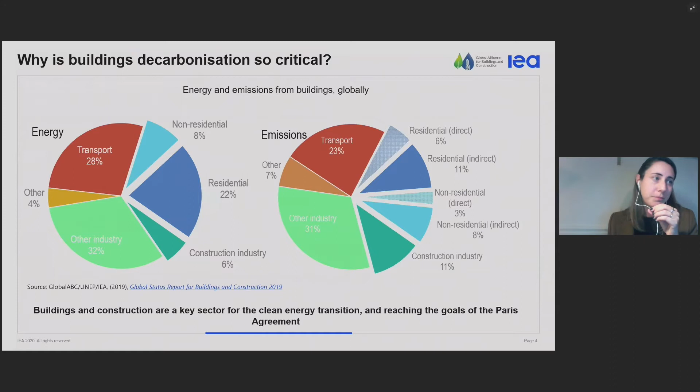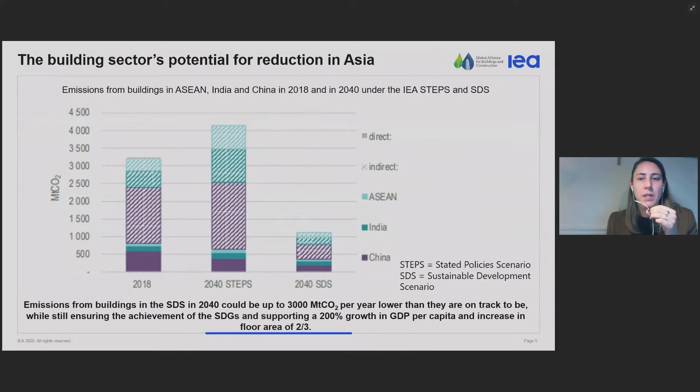So if we look at the emission savings potential of the building sector in ASEAN, India, and China combined, this is a figure from the IEA's World Energy Outlook analysis, and shows us that under the stated policy scenario, total emissions in the region would increase by about 1/3 by 2040. But with increased ambition on energy efficiency and renewable energy deployment, total emissions from the sector could actually be reduced by 2/3 of what they are today. All of this while still ensuring universal access to clean cooking and to electricity, supporting continued growth in GDP and floor area and access to energy services. Next slide, please.

So if we look a little bit at what this scenario would look like, so this is the SDS, the Sustainable Development Scenario, we see that this would be supported by a fuel mix transitioning from coal to increasing amounts of renewables, so PV, wind, and hydro in the region. And this would support a growth in electricity consumption in buildings, all while maintaining continued growth in per capita electricity consumption and increase in floor area. Next slide, please.

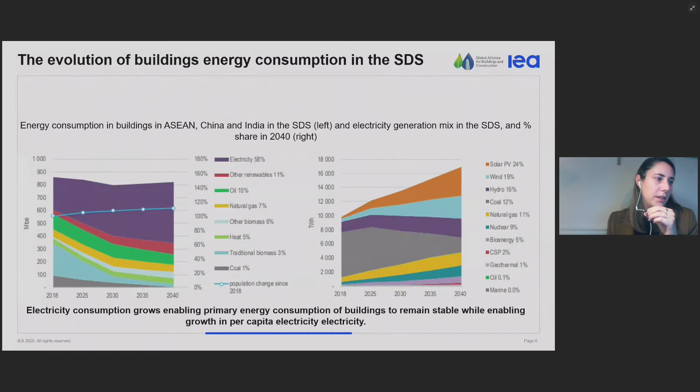And as well as being a crucial sector for reducing emissions, buildings are also vectors for achieving several other important benefits. So for example, providing more thermally comfortable environments, which are conducive to better well-being and higher productivity, more affordable and accessible energy services, resilience to climate events, more livable and equitable cities, and increased resource efficiency of materials. So the building sector is really where we can unlock all of these different benefits. And buildings will also be key in interfacing with an increasingly variable renewable power system. They'll increasingly need to provide flexibility.

And also, as is particularly important in current times, the buildings and construction sector is a huge employer, as Martina mentioned, and holds significant potential for stimulating economic recovery, and even more so if this recovery is a green one. So we'll be discussing that in a little bit more detail later on.

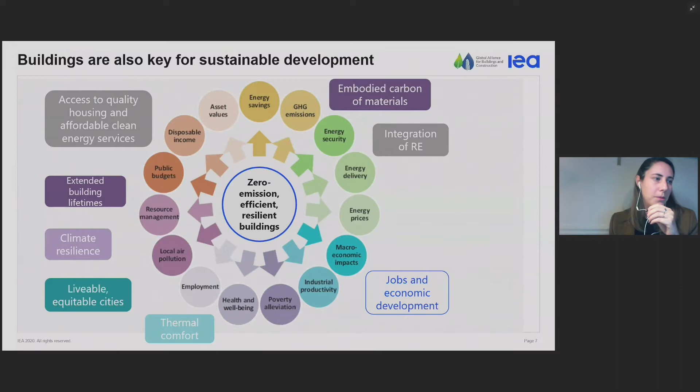Next slide, please. So in order to understand how to unlock these benefits and develop a common vision for how to work across this large value chain towards achieving net zero carbon buildings, we've been working with the GlobalABC to develop these roadmaps. And in total, we engaged with about 700 stakeholders across the 3 regions to build out timelines for each of 8 key themes. So spanning urban planning, new buildings, existing buildings, building operations, appliances and systems, materials, resilience, and clean energy. So to really capture all of the different facets of the way that buildings impact on energy consumption. And for each of these themes, we looked at what is the current status and what is the vision to 2050, setting milestones for the short, mid, and long term.

And what we found overall was that there is ambition to strive towards net zero carbon buildings by 2050. And there are many excellent examples from across the regions of effective policies across all of these different topics. We also uncovered the wide range of multiple benefits that motivate different stakeholders and the wide range of stakeholders that there are. But we also saw that there's a strong need for increased integration and coordination across disciplines and across different levels of government. And there's also a need for more mandatory regulatory policies and more data to create baselines from which to develop more targeted policies. We also found that building materials and resilience stood out as topics most in need of data and information. And this was across the 3 regions that we looked at.

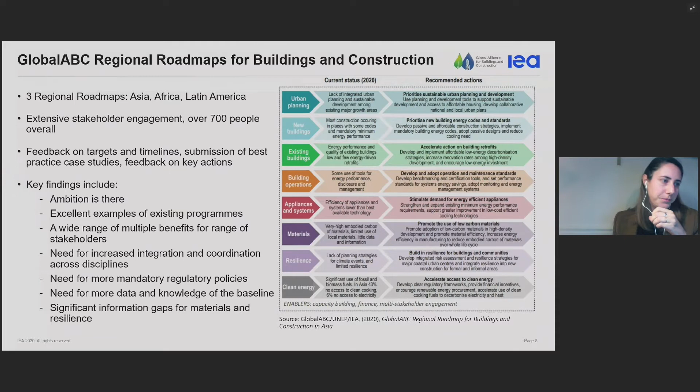Next slide, please. So the way that we developed these roadmaps was starting from a 2016 version of a global roadmap. And then that's when we started the process to regionalize these, starting with Latin America, Africa, and Asia.

And the methodology was to develop a survey from which to collect information from a wide range of stakeholders in the building sector, to collect information on current status of good policy examples, performance of technology. We also hosted a series of online workshops and some in-person events like the Singapore training for green buildings that I mentioned earlier. We also held a regional roundtable in Bangkok and a meeting with several stakeholders in New Delhi in India. And through this network of stakeholders, we also engaged with them to get feedback on our drafts. So we had several versions and received feedback on the timelines and the measures proposed.

And so for each of these 8 themes, the structure was similar. So we looked at regional trends on that theme, summarized the key actions, identified the key stakeholders, and then identified policy timelines and regional examples. So what are the key policies, and what are the short, medium, and long-term targets for those policies? And the same thing for technology. And both of these complemented with examples from the region of best practice of good programs. We also identified finance, capacity building measures to support those, and then identified the specific multiple benefits that could be achieved from those themes. Next slide, please.

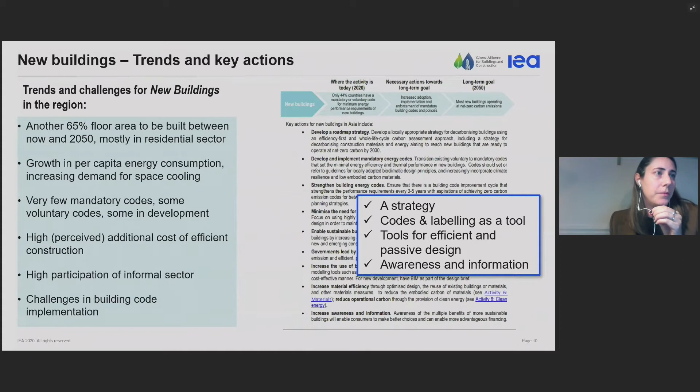Next slide, please. These are examples of the timelines that I mentioned. So on the left, we have the policy timeline. So the types of policies that we talk about in new buildings include building energy codes, but also the aspect of compliance with building energy codes, participation of the informal sector, building labeling of building components, building passports, life cycle analysis, and incentives. So these were the priority policies that are key to reaching net zero carbon buildings.

And you'll see in bold, there are 2 sets of targets. In bold is the target for the region, and below that is an aspirational target. So recognizing that regions have diversity in terms of some cities being more advanced than others, some countries being more able to deploy certain policies than others. So we have this sort of 2-tier normal and aspirational target there to show these different pathways.

We also identified for each of these topics where there was a lack of information to be able to set a target, or a lack of consensus around what the stakeholders thought would be an adequate target. So these are the ones shown in orange, and in red are where we found what we called an ambition gap, where stakeholders did not think that, for example, carrying out life cycle analysis was going to become mainstream by 2050, when it's actually a really important tool to enable better design decisions. So that's the sort of model that's used across the 8 themes.

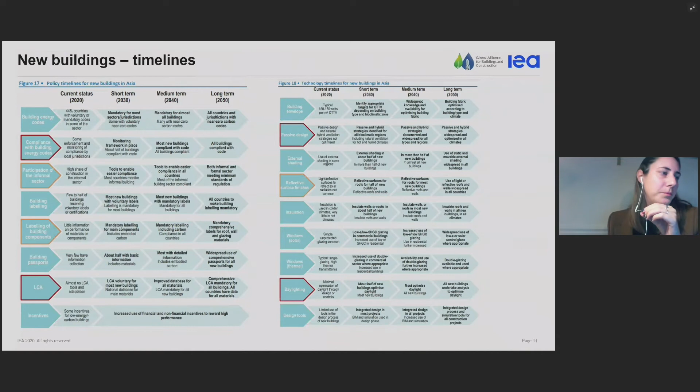Next slide, please. And as I mentioned, we also collated examples of programs and policies that we found across the region to showcase some of the really great initiatives that are already underway. So under the new buildings chapter, we have some examples from India, from China, from Malaysia, from Korea, and from Singapore, with some links for more information. Next slide, please.

As I mentioned, for each of the sections we have a subsection on finance, capacity building and multiple benefits. So identifying what are the most relevant financial mechanisms that can be used to deploy the measures that have been identified, and looking at what are the capacity building priorities and categorizing them between training that's required within government, training of professionals, training of financial sector and developers, general awareness, and training of product material manufacturers. And then identifying what are the relevant multiple benefits of that sector to be able to use as evidence to start implementing these policies. Next slide, please.

So now I'm just going to talk you through the highlights of the other sections to describe what sorts of policies are discussed there. So within urban planning, for example, we know that Asia Pacific is home to many of the largest cities on Earth and to large populations exposed to extreme weather events and climate. Therefore, cities are crucial to reducing the impacts of and adapting to climate change. The types of measures discussed in this chapter include location efficiency, transit-oriented design, mitigation of urban heat island effect, data collection, and digital tools.

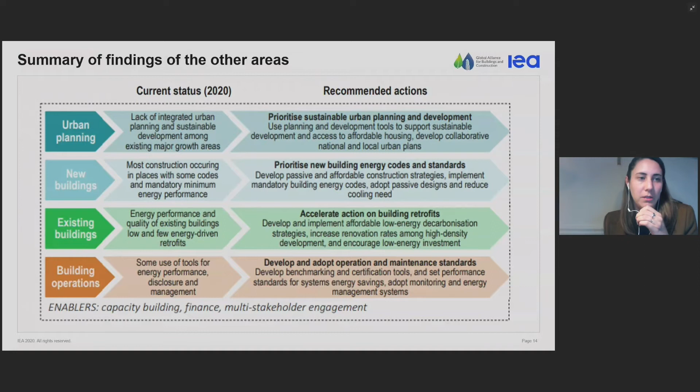New buildings I've already talked you through. So existing buildings: while the construction growth is much higher than the rate of renovation in existing buildings, there's still a lot of potential there. So here we discuss measures to increase the rate and depth of building renovation. Operations was an area where strong data was critical in being able to identify the most effective strategies for different types of buildings. So the measures we discuss here are how to increase the rate of energy audits, benchmarking, accelerate the adoption of energy management systems and controls and digitalization. Next slide, please.

In terms of appliances and systems, we talk about setting regularly updated, robust minimum performance standards, combined with comparative informative labeling to facilitate consumer choice and the implementation of incentives and procurement policies to boost the efficiency of the entire market and increase access to these appliances. This was an area where regional collaboration for standard and testing harmonization was highlighted as being very effective, as is already the case in the region with the harmonization of AC performance standards.

In materials, we're looking at embodied carbon, improving production methods for construction, but also identifying and developing low carbon alternative materials and construction techniques. Here the lack of data was quite strong to be able to identify specific measures. So focus is particularly required on information disclosure and tools to build up this database and enable life cycle decisions to be taken. Resilience was about adapting cities and buildings to the adverse effects of climate change. And the key measures here were about risk mapping and monitoring, development of integrated resilience strategies, and the development of preventative measures to water and extreme heat.

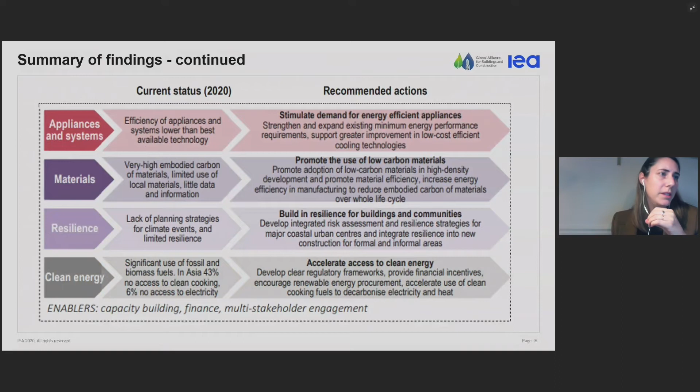Sorry. So I just wanted to pause here and acknowledge the fact that this work was undertaken before the COVID pandemic, and explore what that means. In fact, the public health crisis and economic crisis have only strengthened the reason why efficient and healthy buildings are so important, as Martina put so well earlier, and how valuable the multiple benefits that we saw earlier really are.

So the IEA and the International Monetary Fund worked on a report this year called the Sustainable Recovery Report, in which different measures were analysed for their contributions to a green economic recovery. And buildings efficiency consistently came out on top for many reasons. The jobs that are created are local. Measures are often very labour intensive. They can be deployed quickly, and they support the improvement of homes and critical infrastructure such as schools and hospitals.

So here we see a snapshot of that analysis showing the amount of jobs created per $1 million of capital investment. And we see that buildings efficiency retrofit and efficiency in new buildings comes out on top. So we think that this is an opportune moment to boost investment in buildings efficiency and clean energy. And we're looking forward to discussing this later with you in the panel, in the discussion, and through the polls.

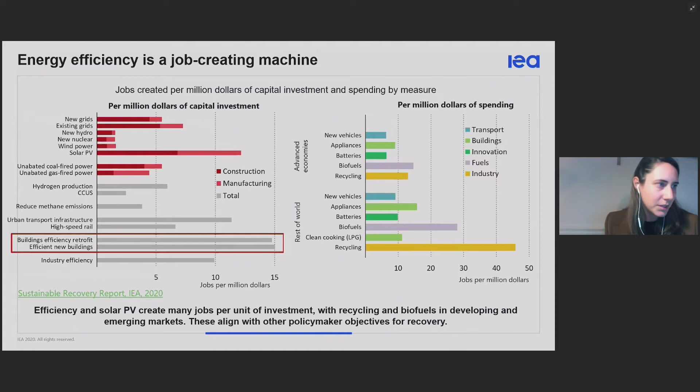So we really hope that this process and these regional roadmaps will spark regional dialogue and collaboration across these regions, inspire concrete actions and national strategies for decarbonisation and economic recovery, keeping in mind that these measures are in line with the design features of stimulus measures that are being devised at the moment. And we also hope that they'll highlight the need to fill the critical information and ambition gaps that have been identified in those documents.

So you can click next. And so for the immediate next steps for the IEA, we've already started on a roadmap for mainstreaming energy efficiency in residential buildings in India. And we're also here today to discuss the ASEAN roadmap for buildings and construction and the ASEAN roadmap for space cooling. This is in complement to the other initiatives that Martina has mentioned in Cambodia and in Vietnam.

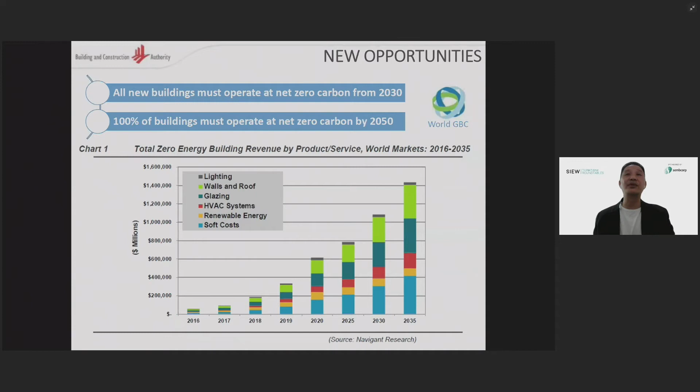Next. So what can we do to overcome these challenges? Next. Focus on greater building energy efficiency. So back in 2018, the Super Low Energy Program was launched by Minister Lawrence Wong at the International Built Environment Week. This is part of the Building and Construction Authority's continued efforts in green building development since the launch of our Green Mark scheme in 2005. He outlined the ambition of pushing building energy efficiency towards 80% from 2005 levels by 2030.

To achieve this, 3 key activities were highlighted as instrumental to the success of Super Low Energy Challenge, namely the SLE Technology Roadmap, Green Mark for Super Low Energy, and the raising of industry capabilities and awareness. I'll go through a bit more about all of these initiatives in detail in the next couple of slides. Next. But before I do so, let me explain what Super Low Energy is.

Using Green Mark as a reference, Green Mark is a performance rating tool on the environmental sustainability of a building and has a minimum energy efficiency that has to be met, which is code compliant. For building owners or developers who are more ambitious, they would strive to achieve greater energy efficiency or savings and be certified under Green Mark Platinum, which represents a 50% savings from the baseline. For Green Mark Super Low Energy, it requires an even more stringent energy savings of 60%.

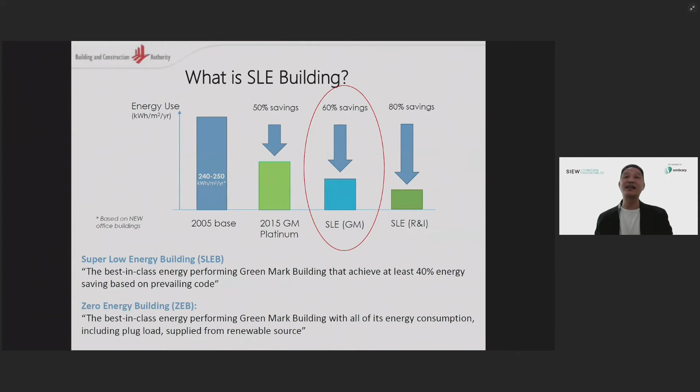To help us achieve SLE, BCA in collaboration with the industry and academia developed the Super Low Energy Technology Roadmap. It outlines the broad strategies to help the industry to design and develop cost-effective SLE buildings. The roadmap identifies a range of technologies which, when put together, will be able to achieve SLE. The technologies are grouped into 4 broad areas, namely passive strategies, active strategies, smart energy management, and renewable energy, where more than 60 technologies have been identified, some of which will still need to be developed through R&D. Next.

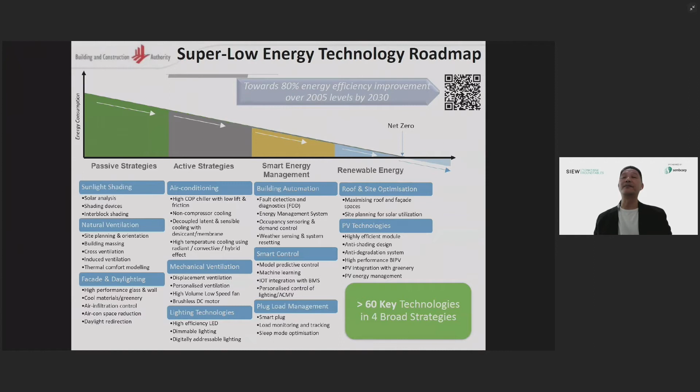The other strategy is to drive large-scale adoption via the Green Mark scheme. This serves as both a recognition of the developers or building owners' efforts and also for greater deployment of technologies, which is essential to scale up adoption. The Green Mark scheme, coupled with the green building policies and incentive schemes, have been instrumental in stimulating the growth of green buildings in Singapore, with 42% of our gross floor area green, and with a target of achieving 80%

by 2030. By adding the SLE component, it would emphasize the commitment of the developers and building owners to strive for greater energy efficiency. To date, we have certified 41 Green Mark SLE buildings, which includes new and existing buildings, with 14 ongoing SLE projects. Next.

Various seminars and workshops were conducted to bring the industry up to speed on SLE. There were opportunities for completed R&D projects to be showcased to the industry partners to collaborate and take up the technology. More than 20,000 participants have attended our events. Site visits were organized to share the best practices by some of our forerunners in the built environment, and outreach efforts through our periodic publications. Next. Okay, next. So how can we help?

To achieve these targets, BCA adopts a systemic approach to drive R&I within the industry, from formulation of roadmaps to successive stages of R&D, providing test-bedding platforms such as the BCA SkyLab, and to the establishment of standards such as mandatory requirements under Green Mark to drive adoption. Next.

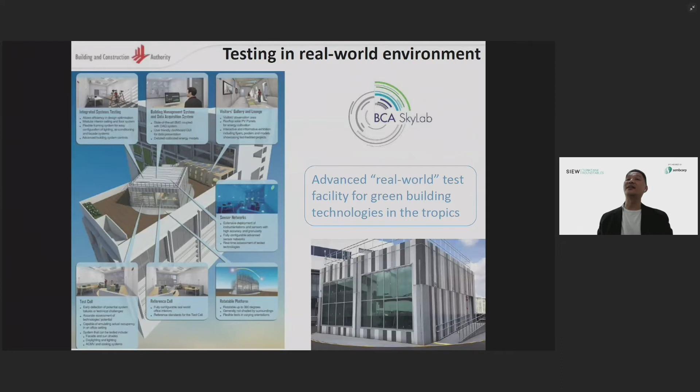Sitting on a rotatable platform, the SkyLab consists of 2 test cells, a reference cell which is fitted out with Green Mark Platinum standard technologies, and a test cell where the technologies will be tested. The SkyLab can be rotated according to the building's orientation to test the technology performance. More than 200 sensors covering various aspects of energy and IEQ provide a host of data that is used to analyze the technology performance. Next.

To help these technologies move up the TRL scale or technology readiness level, the GBIC demo was put together to encourage building owners and developers to demonstrate innovative energy efficient technologies in actual buildings. Through the successful demonstration, these technologies will be replicated, scaled up and adopted, and eventually go overseas.

Such demonstrations will also help us in our policy formulation, such as raising the baseline, for example, mainstreaming SLE with the help of innovative and validated technologies, and also introducing annexes on specific technologies in the Green Mark schemes, which will score additional points if implemented. Most importantly, these demonstrations will provide useful data for setting of new benchmarks to help raise the standard within the built environment. Next.

To promote and bring innovations closer to market adoption, the GBIC demo supports large-scale pioneering of promising energy-efficient technologies in actual buildings to validate the performance of the demonstrated technologies. These promising technologies could include completed R&D projects from our universities or research institutions, or emerging technologies from industry that have yet to see wider adoption in Singapore, to be pioneered in developers' buildings to showcase practical and replicable solutions.

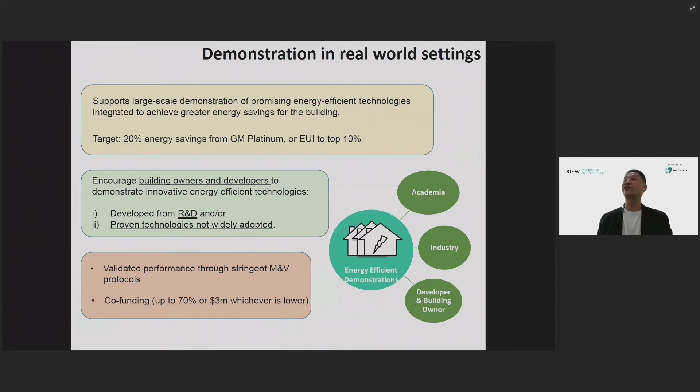By integrating these technologies, the demonstration project should achieve performance of at least 20% energy savings from Green Mark Platinum standards, or top 10% EUI for building typology. This performance is measured with data collected from an array of sensors and meters following international performance measurement and verification protocol standards. Next.

In the next couple of slides, I'll be sharing some of the SLEB exemplary projects that have been demonstrated in Singapore, starting with the Zero Energy Building at the BCA Academy. This is Southeast Asia's first zero energy building, retrofitted from an MEP workshop, mechanical, electrical, and plumbing workshop. Repurposed as an office and institutional building, the Zero Energy Building adopted more than 30 technologies to reduce the energy demand and generate renewable energy via solar PV.

Some of these technologies have seen commercial adoption, such as the underfloor air distribution system and the passive displacement cooling. With all these technologies integrated, the Zero Energy Building was able to achieve an exemplary energy performance of 83 kWh per square meter per year, which is about 67% of energy savings from the 2005 baseline. In the past 10 years, it has served as a demonstration and educational platform for the industry, academia, and the general public, receiving more than 35,000 visitors.

Next. As mentioned earlier, with the launch of the SLE program, the Zero Energy Building underwent an upgrade to remain relevant to the industry with the aim of achieving 73% energy savings. With further reduction of energy use intensity by leveraging on emerging technologies, we are able to push the Zero Energy Building to become a positive energy building with 40% energy surplus production by end of 2020 by refreshing our solar PVs. This is achievable by replacing the existing solar PVs with a new PV system that's capable of producing up to 200 kilowatt peak of solar on the rooftop.

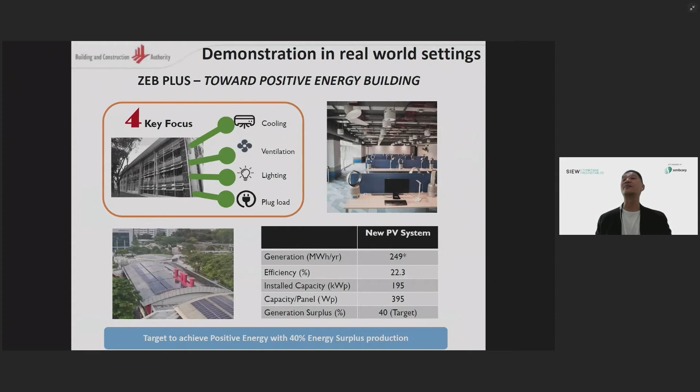Well, could we come to the end of the presentation, please, because we're a bit over time. Yep, okay, sure, no problem.

Yeah, so the next couple of slides are some of the examples of SLE projects. I'll just run through quickly. What we have here is a mid-rise zero energy building in the city center, which is the SMU Connexion.

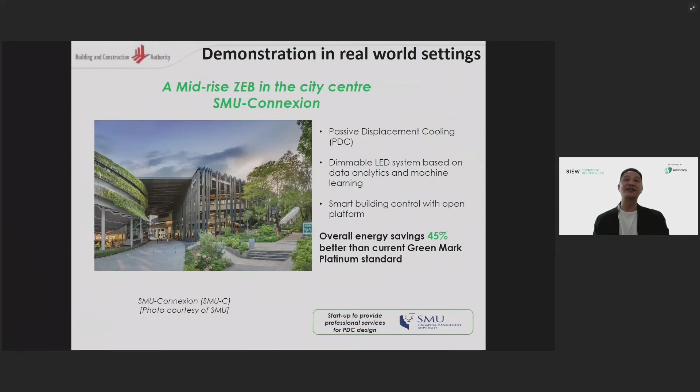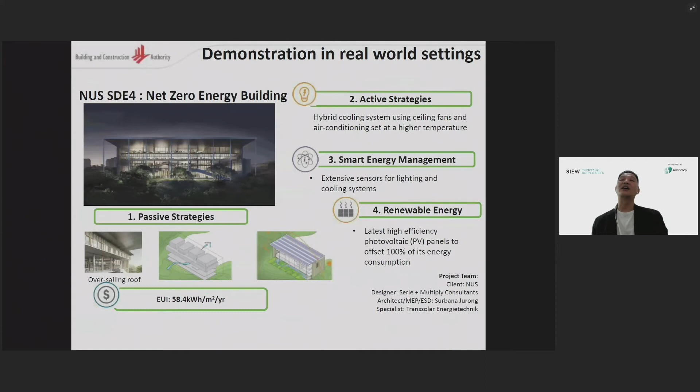Lastly, we have the NUS SDE4, a net zero energy building by the School of Design and Environment at NUS. This is a recipient of the Green Mark Incentive Scheme for Design Prototyping. And they were able to achieve net zero energy with use of various innovative technologies such as hybrid cooling and smart energy management systems. Next.

So with the successful R&D demonstration projects, we also want to showcase all these successful projects to the wider public audience through our SLE Smart Hub portal, which is actually available online. You'll be able to see information on these projects. Next.

There'll be a technology directory where building owners can source for technologies that have been demonstrated before, a smart advisor that will give building owners a high-level assessment of the SLE potential. And lastly, a building dashboard, which will provide information on various building types for building owners to be able to benchmark against.

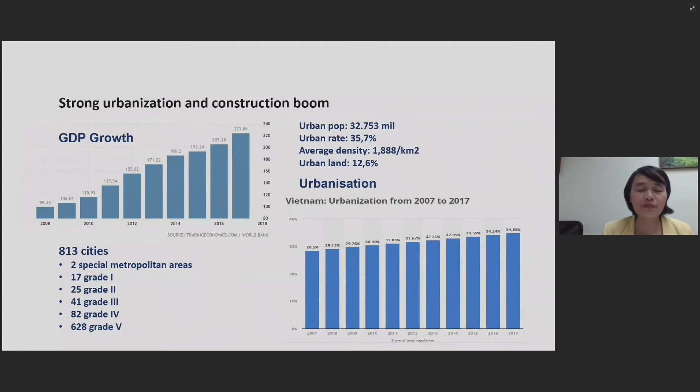So seeing those circumstances, the government is very much aware that we have to act now in many dimensions, to make our growth more green. So the Vietnam Green Growth Strategy and Action Plan for the next 10 years is now under revision. We have had it for the last 10 years already.

And now more action needs to be done at the sectoral level, so that action can be really deployed at the sector. And now we're talking about our construction sector. So the government is now also doing an amendment on our law on environmental protection, LEP, not LAP, sorry. And the government is also revising our construction law and the law on housing.

And our efforts now, in order to make use of the NDC building and construction roadmap, are to try to incorporate those concepts into our law revision so that low carbon building can have a name, can have a terminology in the body text of the law, so it can really be put into effect rather than only study or research or demonstration. We want the program to happen in this country.

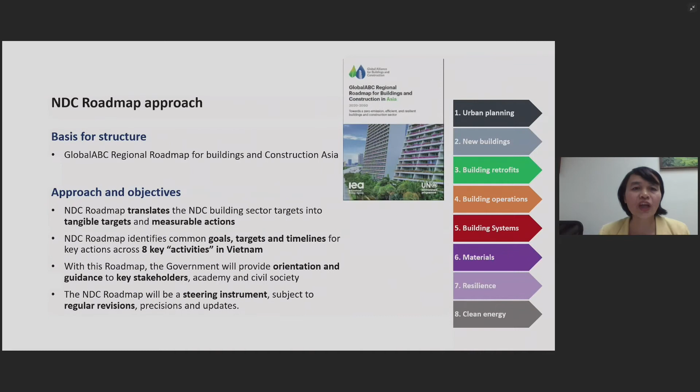If you could kindly come to the end of your presentation, because we're out of time. Thank you. Yeah, thank you.

So that is the last slide on our roadmap development. We started it last September, and by November 20 we will hold a technical stakeholder meeting to finalize our draft, and then from next year we can initiate the political adoption of the NDC roadmap following the regional roadmap. The ministry welcomes any feedback on our process. Thank you very much.

Thank you very much to both our speakers. You can all see that there is a wealth of experience out there already, which is pretty amazing, and we've only been scratching the surface. We wanted to have a panel discussion, but we're pretty much at the end of the time. I want to give one quick question to each of the speakers, and I would ask for very short answers. We'll be rejoined by Maxine, and there is one question to her, and I'll start with that.

And that is the documents of the roadmaps. They are so rich and large, not yet specific to any country, but for a region. What would you recommend as the most useful feature for any individual country? And obviously, we've now seen as well from Kim what will be done with the ASEAN region, so sub-regional level, and then what is being done in a country at the national level. But would you have any recommendation as to what is the most useful feature?

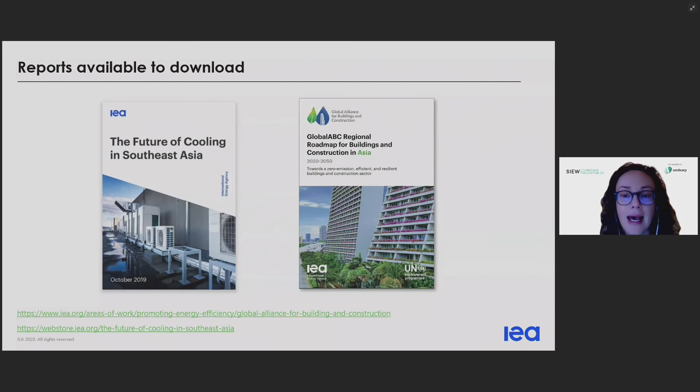Next slide, please. So over the next 12 months, we'll be calling out to all of you to get in contact with us to share your knowledge and experience as we dive into the road mapping process. As we mentioned, we'll be developing a roadmap for energy efficient buildings and construction for the ASEAN region and a specific roadmap on space cooling. We'll run a series of webinars on both topics, so please keep an eye out for those. We'd really love to have you involved.

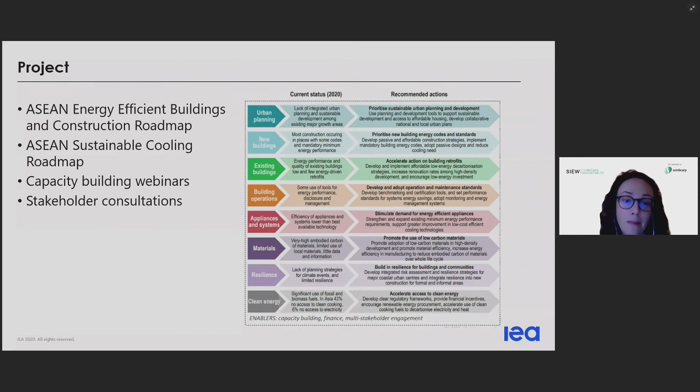And something that's really important to us is stakeholder consultation. So getting your opinion and your experience in making these documents as useful as possible is, I guess, our number one goal. Next slide, please.

So we have a very tight time frame to deliver this work. We have 1 year to do this, so we're really keen to get your thoughts. But just to say that in 2019, in cooling, we produced the Future of Cooling report that I mentioned and presented these results to the ASEAN community.

And this year we've been working, looking at digital tools to really take a deep dive into data collection. So we worked with a company called Big2Great in Denmark, who use web scraping to scrape websites for information. So we collected some data particularly from Indonesia, so that we could get a better understanding of particularly the air conditioning and refrigeration market in Indonesia.

And we also worked with a company called Premise, who uses a crowdsourcing app to ask consumers to collect information about products available in the market. And we did this study in Vietnam, Thailand, and Indonesia. And this gave us a wealth of new data that we didn't have before, and we're currently presenting that data back to governments. So this work really ties into the development of our new cooling roadmap. Next slide, please.

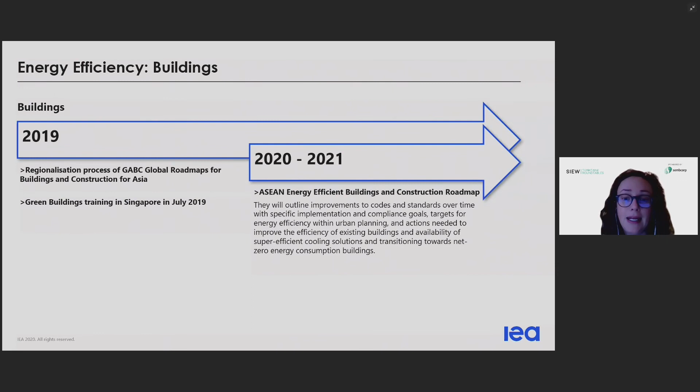As Maxine mentioned, as we're talking about today, Maxine's been working on the Global Alliance for Buildings and Construction Roadmap for Asia. We spent a lot of time working on that and doing a lot of stakeholder consultation. And as Maxine mentioned, we had a workshop in Singapore. And this year, going forward, we'll be starting the work on the ASEAN roadmap. Next slide, please.

So my presentation was only very brief this morning, but I just wanted to give you an overview of what we're doing going forward from now to the end of next year. I'd really encourage you to reach out to me or any of the colleagues on the call today to share your experiences and knowledge, and we'd really like to include you in any stakeholder consultations we have going forward.

So that's all I wanted to say, but now I'm going to hand over to my colleague Ian Hamilton, who is an associate professor at UCL Energy Institute at University College London in the UK, and he'll be running our last session of the day. And this is where we wanted to hear more from you, our audience, through our poll questions. And we'll also be engaging with our speakers further, but this session is really focused on discussing the key challenges emerging from the region under the global health pandemic and ways in which policy actions from governments and global organizations can help to build back stronger with a more sustainable and resilient building stock in the future. So Ian, I'll hand over to you.

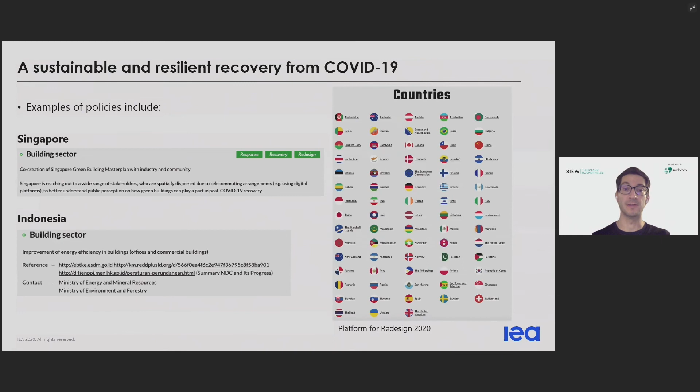And another example being in Indonesia, where the focus of announcing is around how to support energy efficiency in buildings, and in particular offices and commercial buildings. And I think these are the sorts of things which are really going to be necessary going forward, particularly given the implications around how we can access and make use of building spaces again safely in the future. Just go to the next slide as well.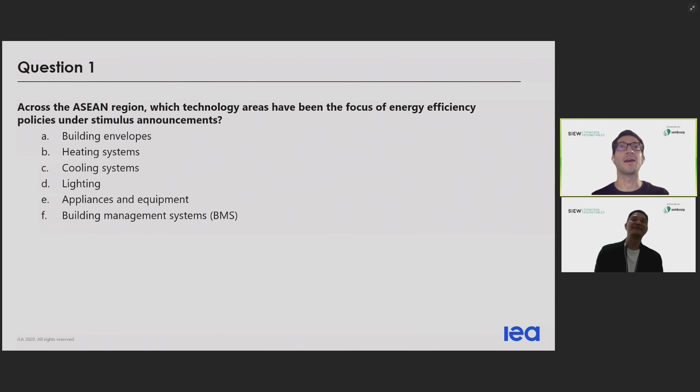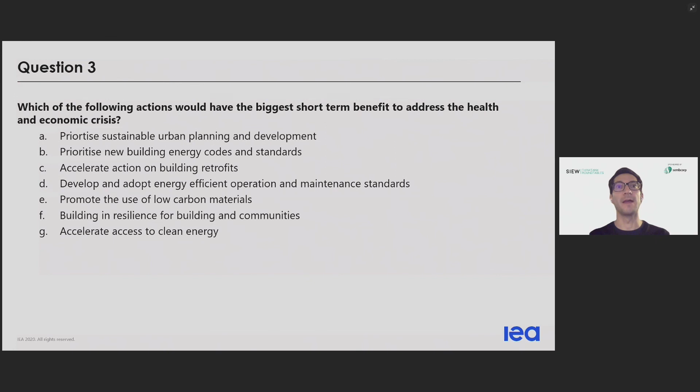And maybe I'll just quickly step to the next question because they're related, and then we can pick up on any remarks from the group, which is, what are the benefits for the longer term? And here the question again is, what actions could be used over the longer term? Again, the same listing. And what I think is interesting here, looking at the poll results, is the prioritization of new building energy codes and standards as being the number one identified element.

This, I think, is a very clear signal that, although 33%, because there's a second one around maintenance and adoption of standards on performance, with the use of codes and standards being developed and applied today, we know that they have such a long-term legacy. And I think that the reality is that the buildings we occupy are an example of that. But they can, of course, with refurbishment be improved on.

And I think that's, again, a key trick here, is that there's new building energy codes and standards. And then there's also ways in which one can take consequential improvements to existing buildings, when you begin to trigger a higher standard because of the amount of refurbishment that's going forward. So I think those are really interesting areas.

Just also to say that areas such as accelerating access to clean energy, and that's incredibly important. And I think this is where the ability to invest in long-term infrastructure around building integrated renewables, but also obviously grid level renewables for the built environment is really important around these type of stimulus actions, especially for the longer term. So I just invite my colleagues, if they wanted to remark on any of those two related questions, the short-term area of benefit that looks at accelerating retrofit actions, and then the longer term around prioritizing building energy codes and standards.